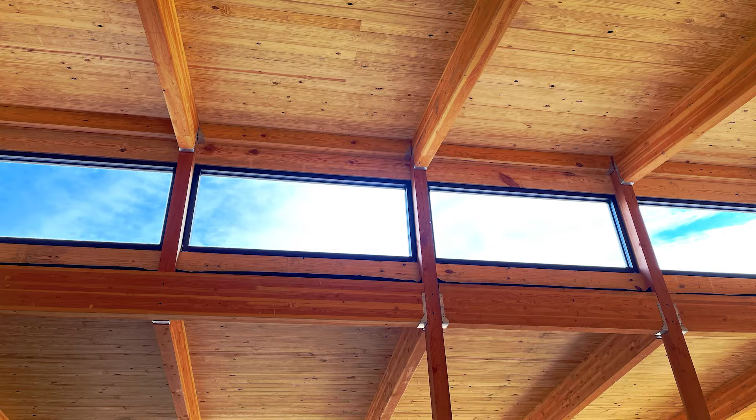A week ago or so, I posted this photo asking which way should clerestory windows be facing to have the best natural light. And we got two main answers. Some people said north, some people said south. Those windows actually face east. So who is right on which way windows should be facing?

I'm going to give you some tools to help determine which way your windows should be facing, because there's not always a right answer, but these tools will help in understanding which way windows should be facing to accomplish different things. I'm going to do that with 3 different points. Point number 1 is we're going to talk about the sun: how it goes across the sky, what it is, and all of its features.

Number 2, we are going to talk about orientation of the building based on what we know about that sun. And then 3, we're going to talk about overhangs, shade structures that we can incorporate that will give us the benefit of light coming into the house at some parts of the year and being shaded at other parts of the year.

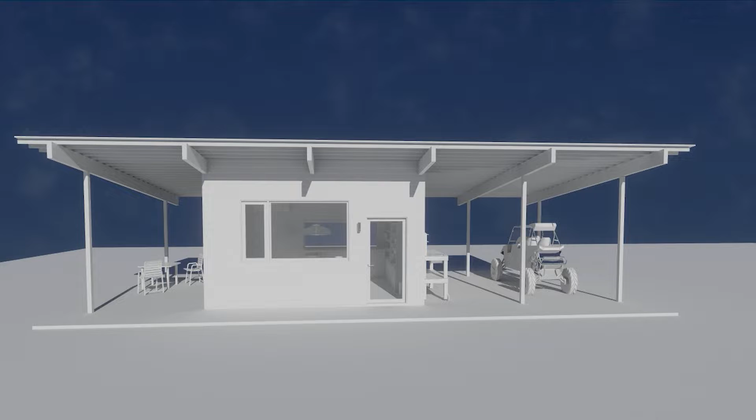So to do that, we're going to talk about this shed right here. This shed is a she shed that we're putting on Monarch Woods as well. I really like using this as my model because it's simple. It's a shed. There's very few design constraints, competing spaces. It's got a very simple job to do, and it's doing that job.

And it has a lot of the same motifs that are used throughout the other buildings, the barn and the residence. But both of those have a lot more things going on and are competing with themselves. There's just a lot of different rooms and different considerations as buildings get more and more complex. That would make it harder to explain the simple truths that we're going to be talking about. So that's why I'm using the shed here.

So first, a few things about the sun. It's bright. Duh. It's hot. It rises in the east and it sets in the west, and it goes over our heads in different places depending on the time of the year. So the brightness we want to utilize in some cases. We want that direct light coming through our windows and being really bright inside. And in other cases, we don't want that direct light, but we do want the indirect light.

The sun is so bright that even if the light's not coming directly from the sun to you, it's going to hit something and bounce back and reflect in. So that indirect light can be utilized in different ways as well. It's hot. Sometimes you want that radiant energy coming directly into your house and warming a space. Sometimes you don't want that.

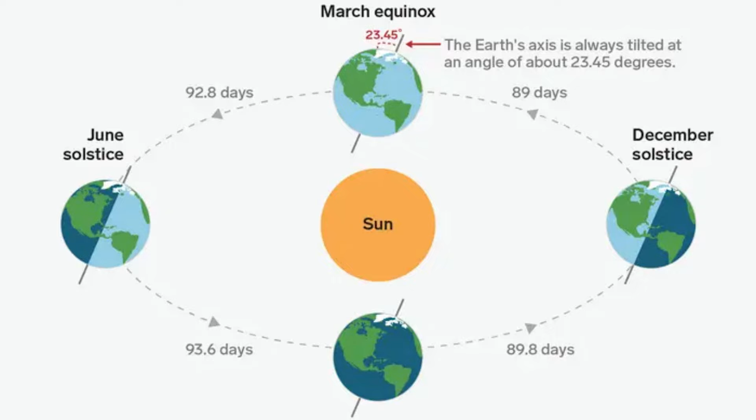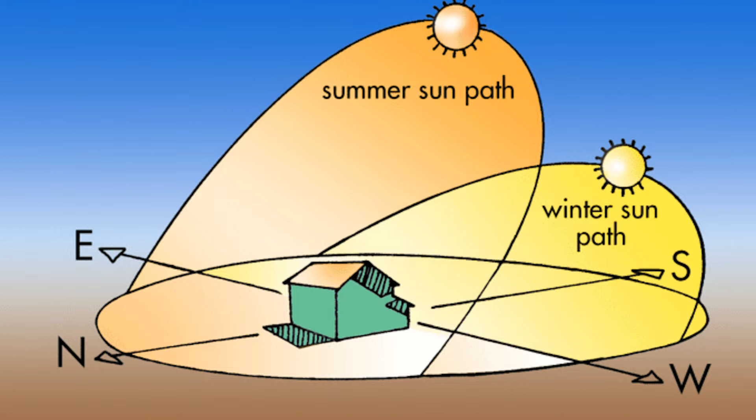and then as we go around the sun to the summer, now we're tilted so the sun is directly in line with us. It's directly overhead. And we can utilize that difference to maximize the sun in the winter and minimize the sun in the summer. So we want to have as much radiant heat coming in through our windows and light coming in during the dreary days of winter.

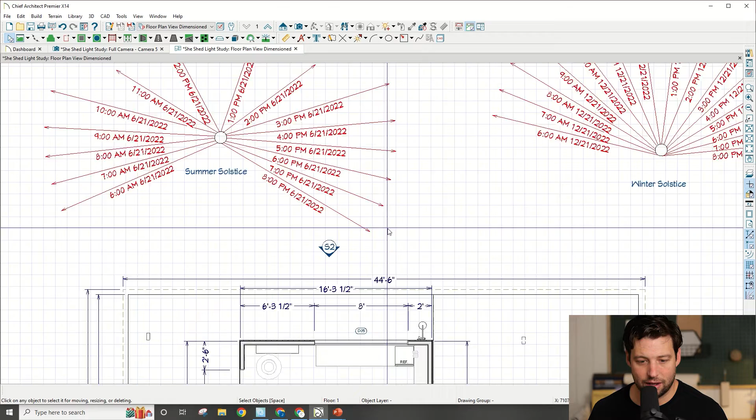And we want to minimize how much light is coming through the windows and how much radiant heat we have coming through the windows during the summer. Let's look here at the shed, and I'll show you a couple of different scenarios. We'll start first with the floor plan here, and I've drawn out several sun angles. This is Chief Architect that I'm using here, and one of the things that I like about it is it's very easy for me to draw in sun angles and actually use the angle of the sun to light the model, so I can do some quick testing and get my design right.

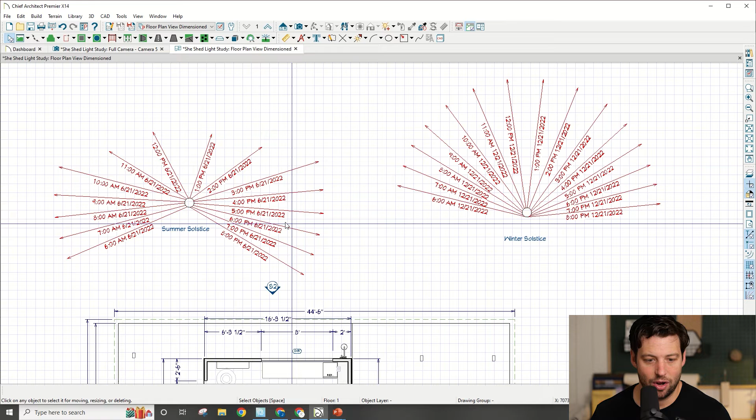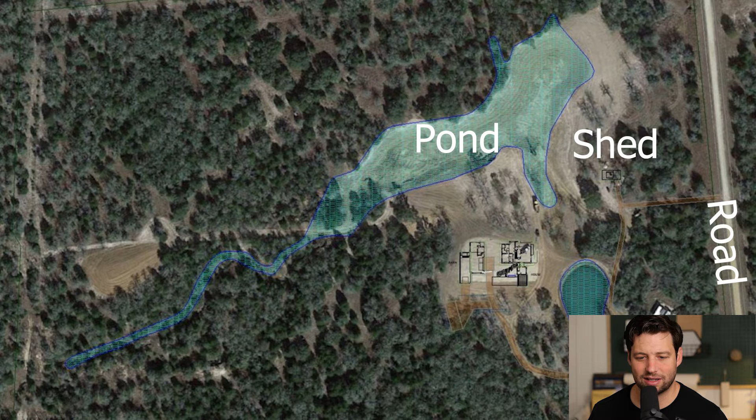So when we first started designing this, we knew that there was going to be a pond over here to the west of the building. So we knew that we wanted to be able to enjoy that view. That was going to be the primary view. We also knew that the road is going to be over here on the east. It's a long way away, but it's going to be over there on the east. So we were less concerned about having great views there. This wall was going to be southerly facing, and this wall was going to be northern facing, and they both have great views, but not as great as the west facing.

So that sort of gave us an idea of like, okay, we want to be able to utilize that west side. Now, how do we design the building to take advantage of those beautiful sunsets over that pond, but not have just a ton of light coming in at the hottest part of the day? The second consideration was, how do we have a greenhouse effect? How can we have plantings going on in this window? This window will have some shelving on it, and there will be seedlings started in the winter and early spring that will need maximum sunlight, but we don't want to overheat the building again in the summer.

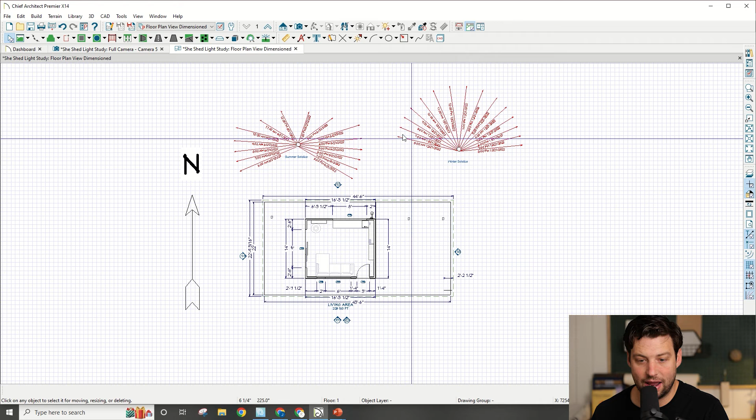So we're looking at overhangs there as well. I'm going to show you here in a second how that all plays out in reality, but back to these sun angles for a second. Obviously, they're all tied to which way north is. So one of my encouragements to people as they are building anything is to design it for the place that they're going to be putting it. It'll be disappointing if you're building your house and you just buy a plan offline. And there's nothing wrong with buying a plan offline, but you need to buy it with the thought of how it's going to be on your lot and how the light is going to play in. There are plans that will do better for certain lots and won't do as well on other lots.

The better recommendation is get a designer or an architect involved early on. Maybe they can modify a plan for you for not too expensive, or ideally they can come up with something from scratch, because building a house is incredibly expensive, and having professionals involved at the beginning is very smart in my opinion. Yeah, it's going to be thousands of dollars, but it's a good use of funds to make sure that the final product is as good as it can be.

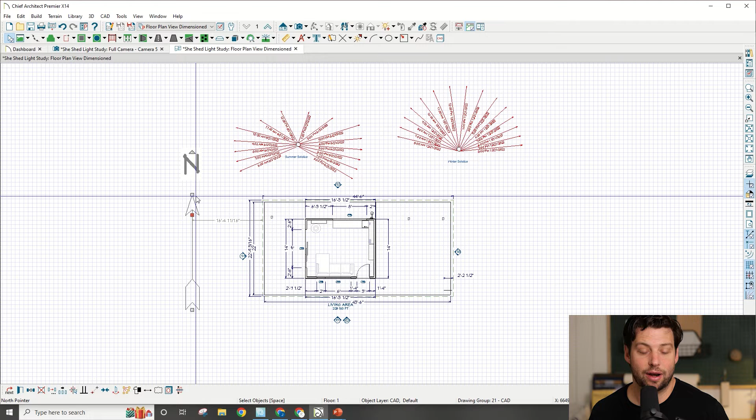So in this case, if we just bought this plan offline, and it's a shed, and we said we're going to put it in our backyard, this is how it was designed to be.

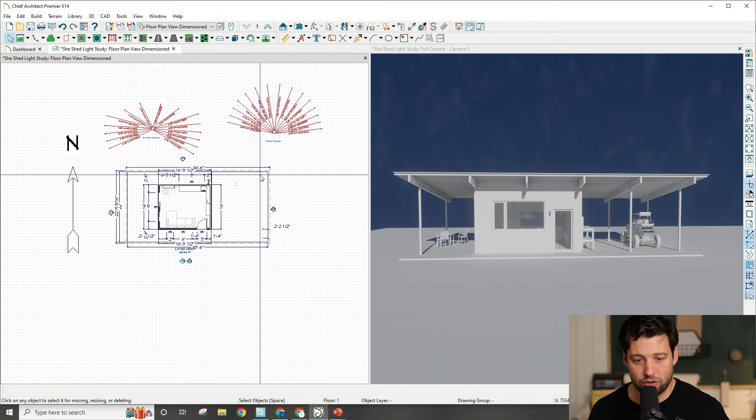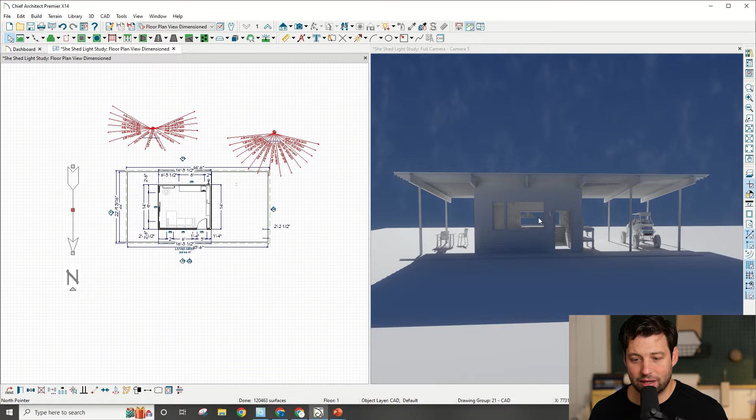In the winter, this is noon on December 21st, the winter solstice. We have full sun on the face of this shed. If we were to plop this on and say that we did polar opposite, now we flipped it to where we're looking at the northern face instead of the southern face, you see that this big window is completely in shade. The back window here, it's getting good light, but that wasn't what it was designed to do.

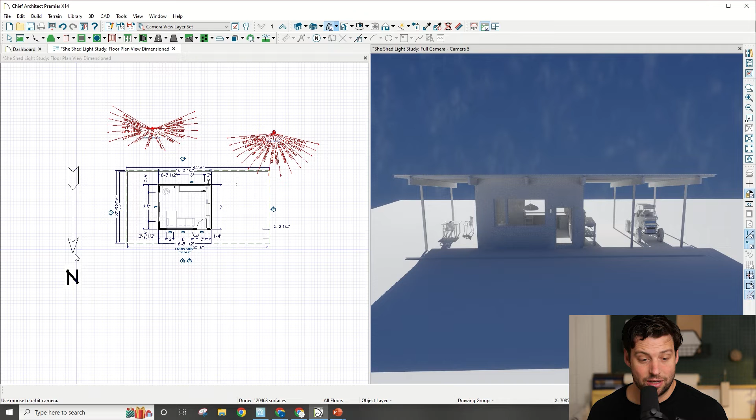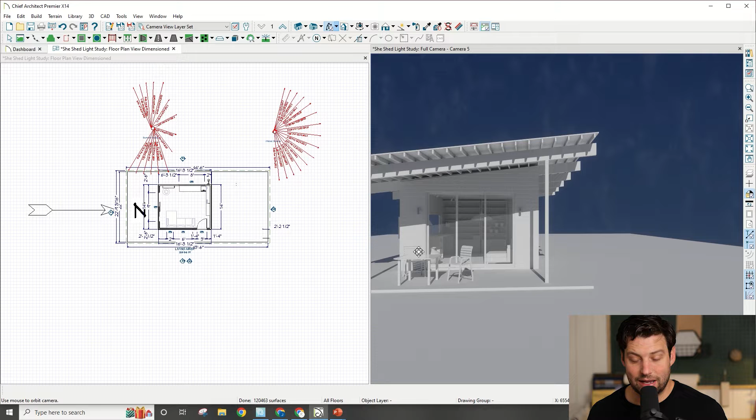It's not the big window that's letting in this winter light. It was supposed to be this, but because we flipped it, now it's not doing what it's supposed to do. And, worse, let's say that we have this shed and for some reason we put it in to where now this is the east facing. Now at noon we've got the sun. It's wanting to creep in, but our overhangs are so big that it just really isn't utilizing the maximum use of these windows here, but it's better.

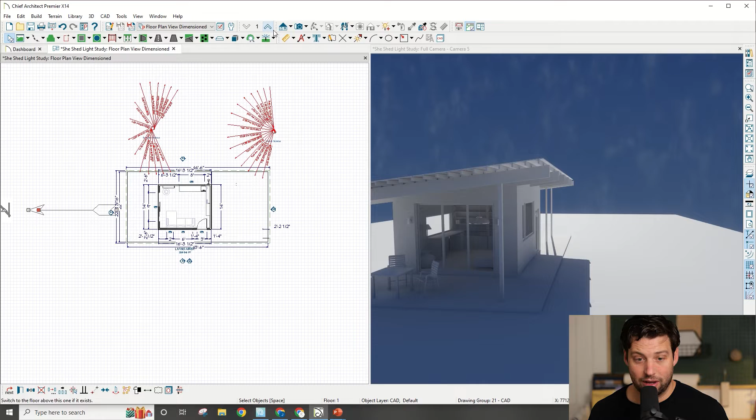And then the worst case scenario is if we flip it completely around to where now this is our northern face. We have completely eliminated all of our natural light coming into this building. So it's wintertime and you're wanting to work in your shed and have good, cozy light while you're out there in the dreary winter, and you've got none of it. It's just cold and it's dark. Your porch where your door comes out to is completely covered. It just doesn't work like it's designed to.

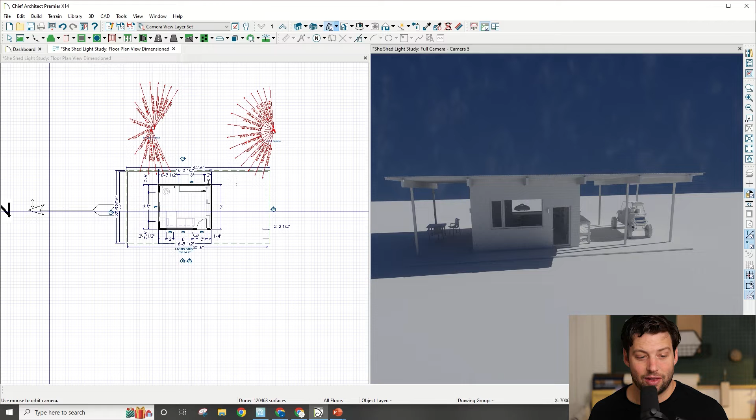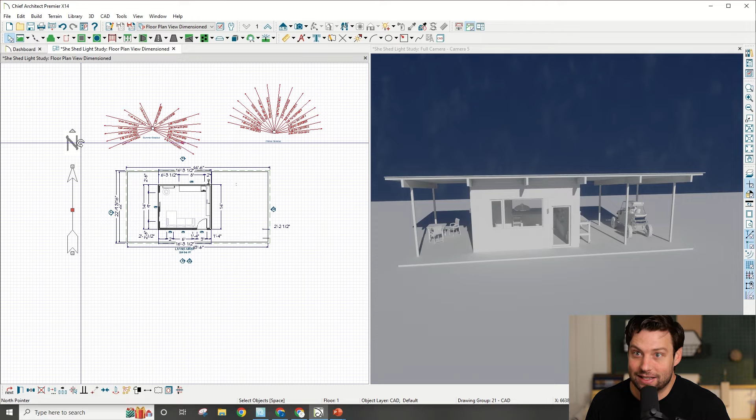So all plans aren't the same. You can't just take a plan that was designed to work one way and plop it in willy-nilly any other way and expect it to perform the same. You can do whatever you want. I don't care what you do, but you can't expect a design, even a simple design like a shed, to perform exactly the same if you just throw it in however you want. You got to think about how it's going to utilize the natural trajectory of the sun. And this is just one example of noon on December 21st.

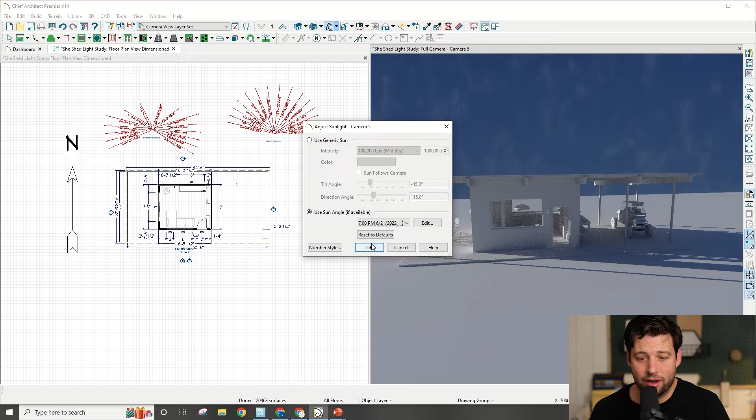Another example, if we change our light here, let's say that we're going to sunset in the summer. Let's say it's 7 p.m. on June 21st. So now the way that this is designed, we get a great sunset here. We've got full light coming in. We're looking over the pond. Everybody's happy. Again, not to beat a dead horse, but if we flipped it around the opposite way, now the sunset is almost completely lost for this porch. You could move your chairs up here. You do get some light here. So that's not the end of the world. That's not the worst case scenario for that one time on that one day with this orientation.

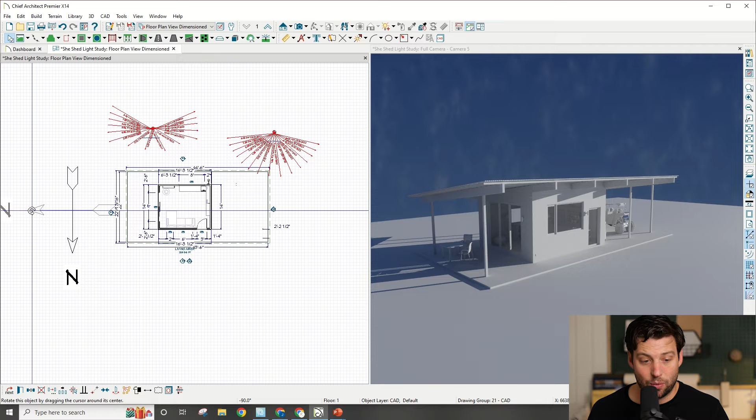You take it to where this is the north face. This is actually not too bad now. You're going to get pretty good sunset again for this one orientation. Doesn't mean that noon will be good. It doesn't mean that the rest of the day or the rest of the year will be good. It just means that on this day it's not too bad in that orientation. And you flip it around the other way, and then this is just dumb. If you were wanting to have a sunset view, your whole building is facing the wrong way. So this is wrong. It's just not what this building was designed to do.

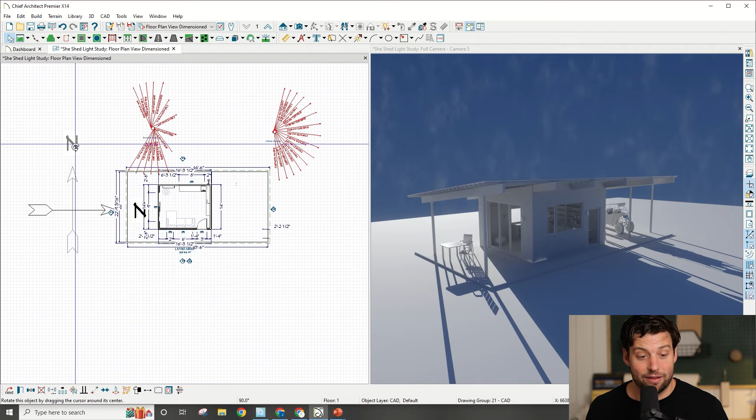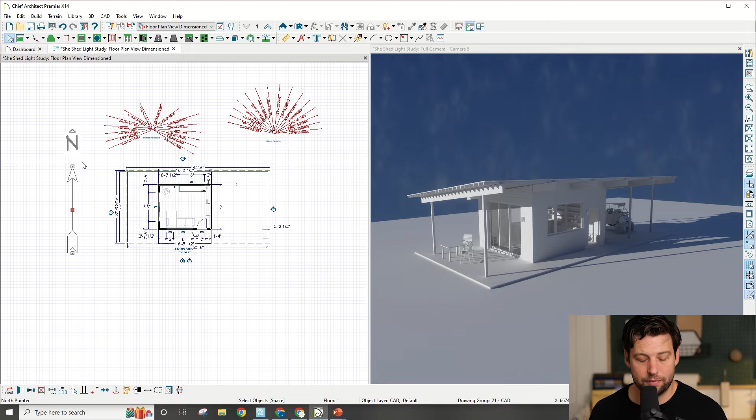Again, this is a very simple shed. Imagine if this was a whole house with a lot of competing views, a lot of competing windows, a lot of competing rooms. It just gets really complicated in a hurry, and if you just flip it around willy-nilly, it won't work as well as it could if it was designed for the location that it was. So we've talked about the sun, how it goes across the sky. We've talked about orientation and how that makes a difference on how the building performs in response to that sun. Now let's talk about overhangs.

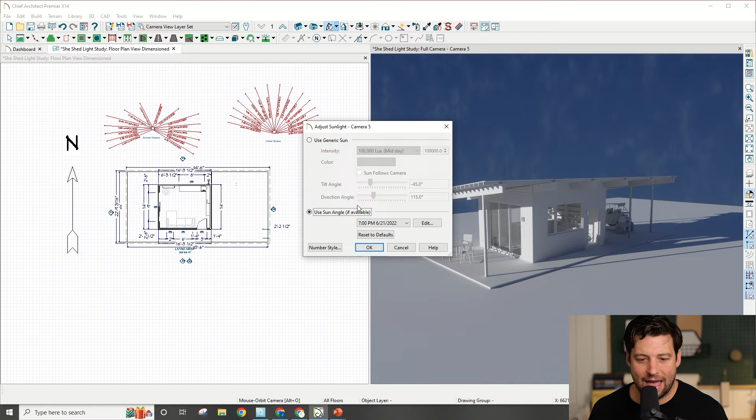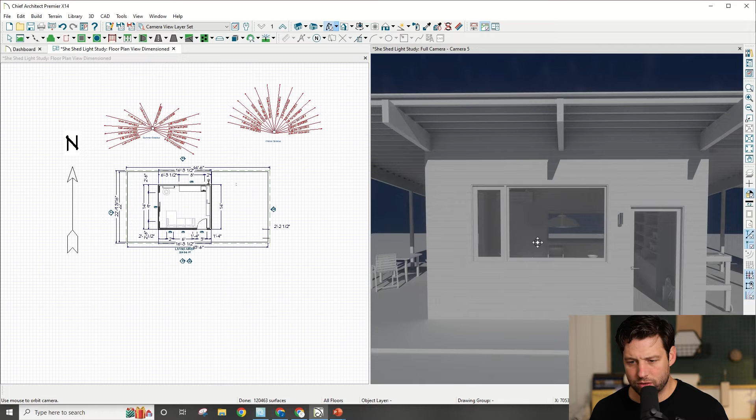The easiest way for us to see this is if we go to noon on the winter solstice. This is the most dramatic time that you will see the biggest difference between noon winter solstice and noon summer solstice. So noon winter solstice is here, and you see that we've got the best possible light coming in through this southerly facing window. We can do shelves here, and we have really great light coming in for our plants.

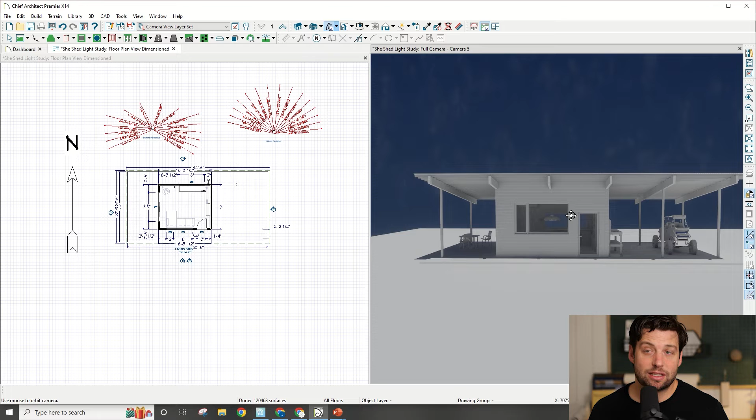Now, let's take it to noon on the summer solstice, right? Now look at that. Immediately you can see that this front overhang is shading our structure. So we're getting maximum light in the winter, and we're minimizing that light in the summer. We're still getting great indirect sunlight because it's bright. It's the sun, but we're not having that glaring direct light coming in and scorching our plants, or on the inverse, getting too hot during the summer. We're able to shade that.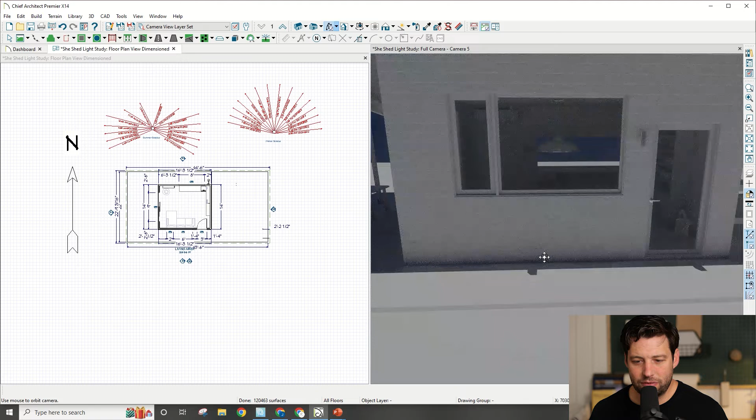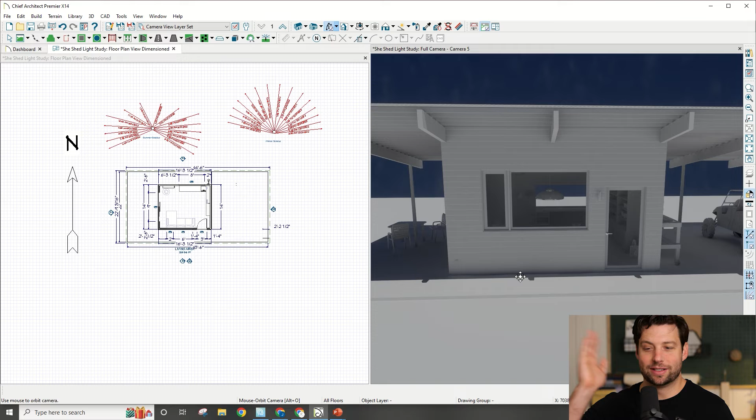And we're able to do that by setting this overhang precisely. So you see here how we've got this shade coming just basically to the foot of our building, and then as the year progresses, it creeps up. And then in the winter, it's going to be fully exposed, and then it comes back down through. So it's like automated shades throughout the year. The angle of the sun and this overhang play together, so it lights the room, and then it shades the room.

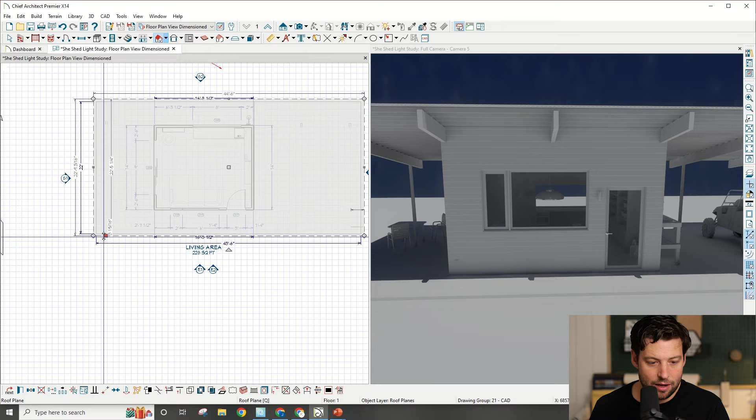If I took this and I didn't care about the design of the overhangs for the shading, let me switch over to roof plane. I can bring this back. Let's just say that I did a minimum modern overhang. Now you see that in the summer, we've got the light just pouring in through that window. I left the rafters there, so those provide a little bit of shade, but if we deleted that off, we would have this whole thing lit up in sunlight in the summer, and it just wouldn't be as nice on the inside.

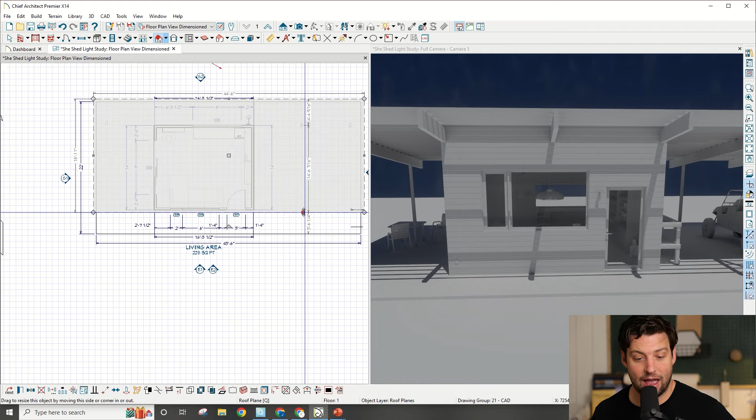Now, the great thing about this particular day at noon is it's so high overhead that even with minimum overhangs, you still get minimum light infiltration in there. But if you go either side of the summer solstice, it can get worse because that sun is now creeping back down to the southern hemisphere and it hasn't cooled off. So instead of June, let's talk about August. Here in Texas, August, it's super hot and that light's just going to be pouring in there. But if you have your overhang set correctly, then you get shade.

And in August, this shade's going to be up here at the bottom of the sill, so that by September you have more, October you have more, November you have more, and December it's fully exposed, and then the cycle reverses itself. So not only can you change how the building performs by its orientation, you can also change how the building performs by overhangs. The front overhang we just talked about with the winter versus the summer.

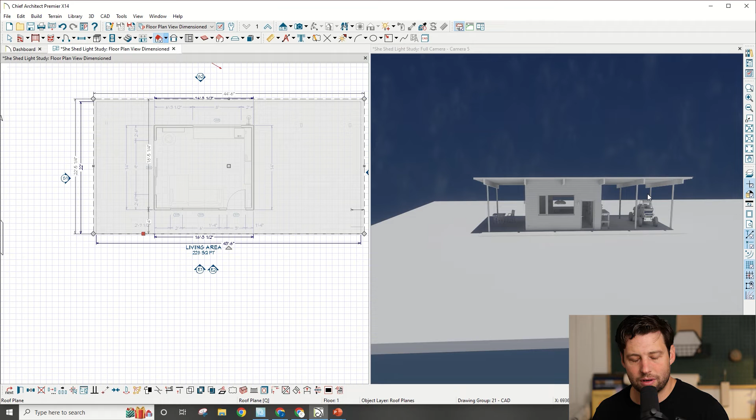These left and right overhangs, on the right hand side we see that as a carport, and on the left hand side we see that as a porch. Those are designed intentionally as well. The carport really isn't looking at anything with the sun, because it's meant as a carport. It has a different function, and that roof is mostly there for protection against rain and the elements, not against sun. The porch is a little bit different.

We obviously want to protect the inhabitants. Sitting on the porch with the rain coming down would be a fantastic way to spend an afternoon. But we also wanted to shade the structure during the hot western sun of the afternoon, but be able to see the sunset as it breaks across that structure. So we can look at that here. Let's say that we're doing 4 p.m.

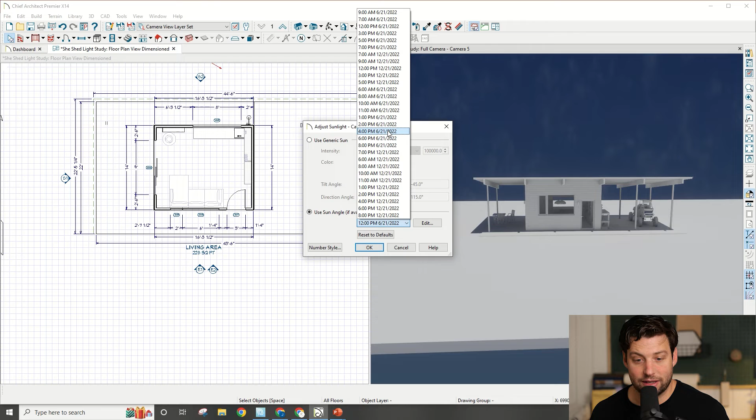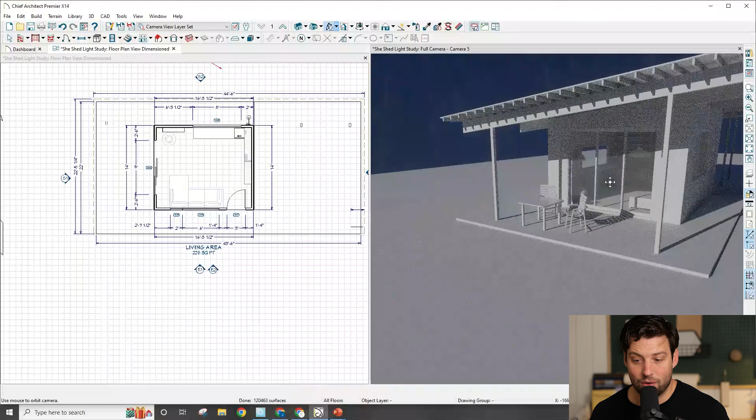In June, and that's the heat of the day, our building is still shaded. And then if we fast forward and we say, all right, now it's 6 p.m. and it's cooling off, and we're wanting to see that sunset. We can see that sunset all the way inside on the couch. The porch is fully exposed, and then by 7 o'clock, the whole thing is completely lit up.

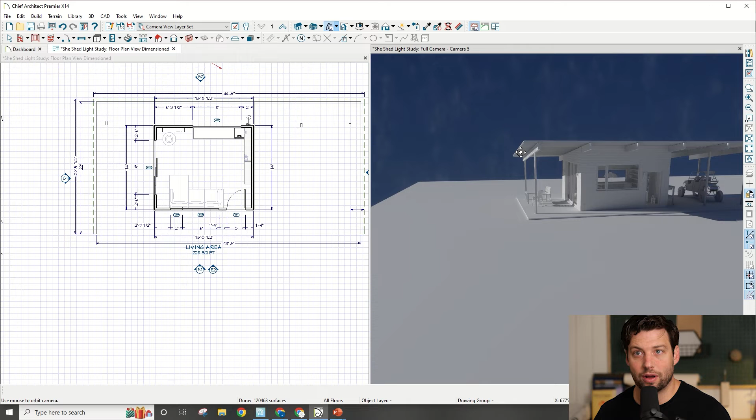So it just shows you that you can utilize these overhangs for multiple reasons, not just protection from the elements, which most people think porches, we're going to keep ourselves out of the rain, and that's absolutely true. But also, if you do it right, you can change the sizing of that so it gives you direct sunlight into the buildings when you want it to be, and minimize the sunlight when you don't want it to be.

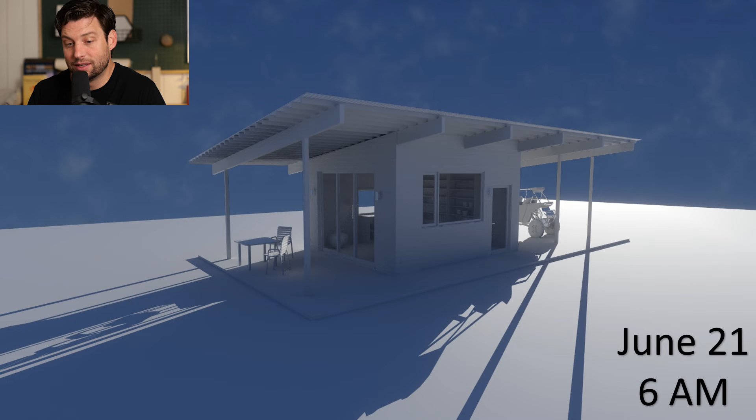And finally, I want to show you how we accomplish the maximum utilization of natural sunlight in this very simple building by comparing the winter solstice and the summer solstice in a time lapse going from 6 a.m. to 7 p.m. on both of those days. So here we are. It is June 21st. It's the summer solstice, and it is 6 a.m. We've got the sunrise coming through. You can see that our whole building is shaded here.

We're not utilizing the sunrise because at this time we're going to be out in the garden. We're going to be waking up. We're going to be working outside in the summer. So we're not so concerned about sitting there and seeing the sunrise. Again, if this was a bedroom, maybe we would have a different design consideration. If this was a kitchenette where you're making coffee, we'd definitely have a different design consideration.

So 6 a.m., 7 a.m., you see how the sun's coming up. 8, 9, 10, 11, we're staying in the shade all the way through. 12, still in the shade. 1, it's hot, but man, our building is still completely shaded. 2, 3, 4, we're starting to get a little bit of sunlight breaking across the building at 4. 5, okay, now we're getting a lot of sun as the sun starts transitioning from afternoon sun to evening sun.

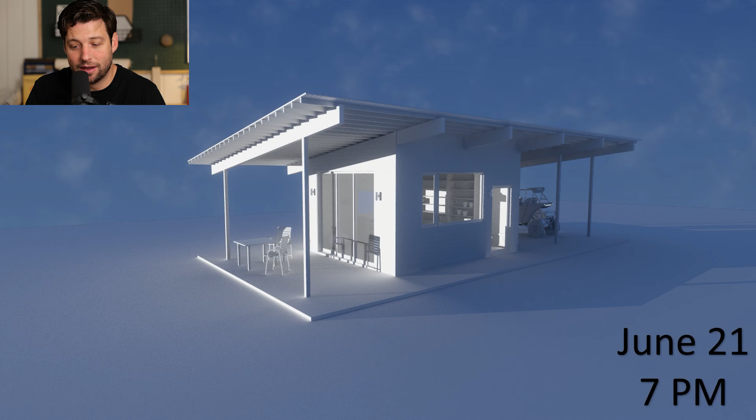6, again, great sunlight, great shadows. And then 7, we're basically pretty close to sunset, and we've got just full light as that sun is setting across that lake. Here it is on December 21st, right? 6 a.m., same time, but the lights are on because it's completely dark. The sun hasn't even risen yet. 7, same thing. 8, all right, 8 o'clock.

Here's the sun. The sun's coming up, and man, we have great sun at 8 a.m. It's later in the day. The vegetable gardeners are not working outside. Most of this work is going to be done inside with the vegetables. So we've got great sun inside, and we're able to enjoy that sunrise.

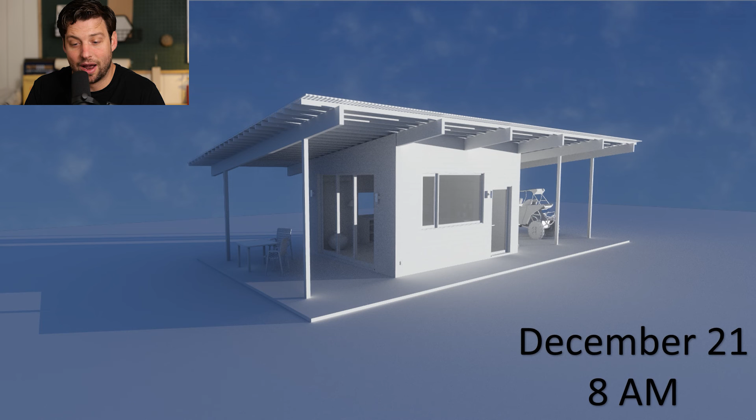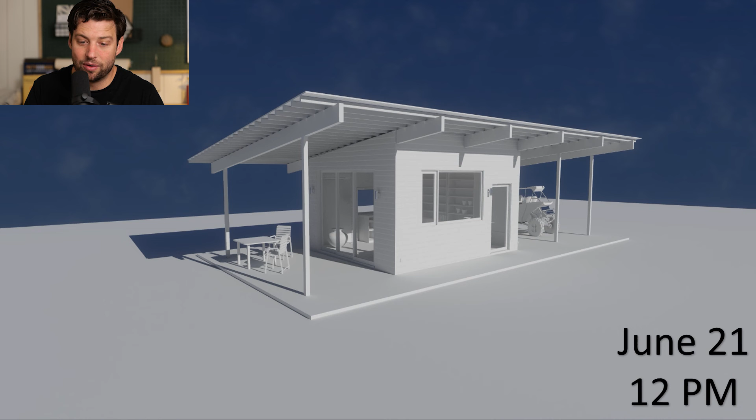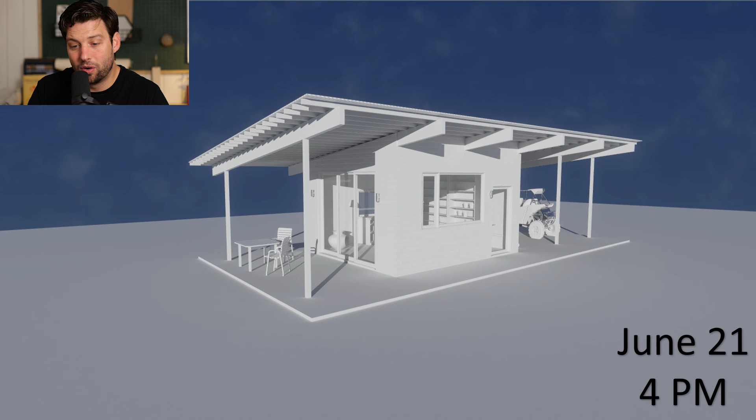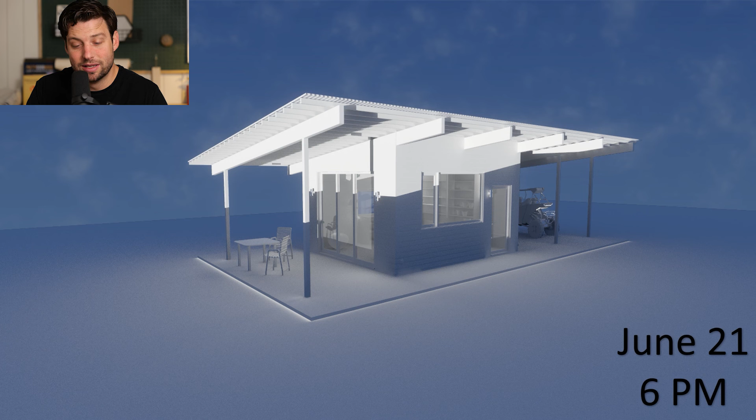9 a.m., sun's up. 10, you see that shadow on the backside tracking around. 11, 12, and you can see that this sun is just moving around, directly shining at this south wall all the way through. 1, 2, 3, starting to go down. 4, 5. Now we're getting pretty close to sunset, and we got this great sunset where the porch is lit up. We've got great light coming into the building. 6, and the sun is actually below the horizon. That's why you get this angle off my terrain there. And 7, we're already back to the lights on condition of our shed.

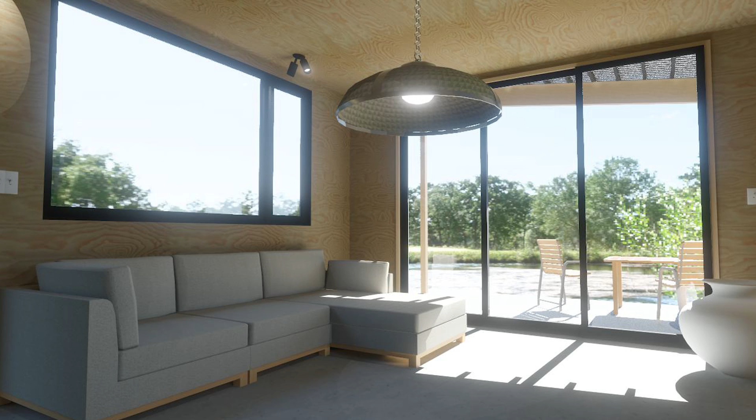Hey guys, thanks so much for watching. I hope this helps. I hope that if nothing else, you start thinking about how the sun is going to be interacting with your buildings, the way you're designing the buildings, or if you're just buying a pre-bought house plan and plugging it in, how you're orienting that on your property to respond to the natural rhythms around it.

Because that can make the difference between it's a pretty house that looks good on Pinterest to, man, this really gives the people in the house a sense of wonder every day. Not because the house is so great, but that the house disappears. The house fades into the background so that they can enjoy the crazy cool creation around them and be connected with nature and people, and the house is just there to support those functions.